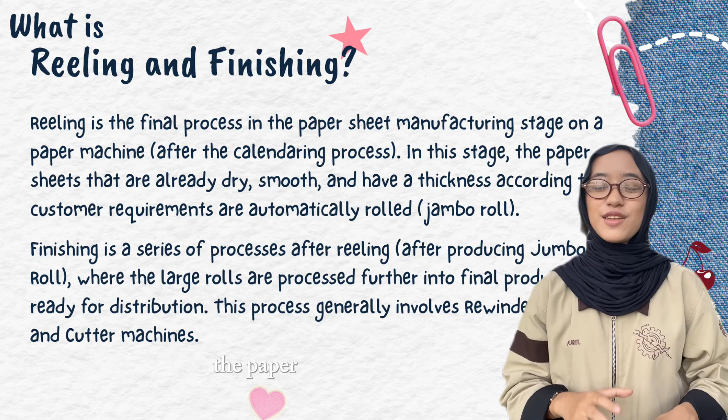What is the reeling process and finishing process? Reeling is the final process in the paper sheet manufacturing stage on a paper machine, I mean, after the calendering process. In this stage, the paper sheets that are already dry, smooth, and have a thickness according to customer requirements are automatically rolled into jumbo rolls.

How about the finishing process? Finishing is a series of processes after reeling. Yes, after producing the jumbo roll, the large rolls are processed into final products ready for distribution. This process generally involves reeling, winder and slitter, and also finishing.

Okay, how about the purpose of the reeling process? The purpose of the reeling process is, first, to convert continuous sheets into rolls. Continuously produced paper needs to be collected in large rolls so that it can be transferred to the next processing station. Second, to maintain quality. Rolls are made with uniform thickness and tension to prevent sheet damage before further processing.

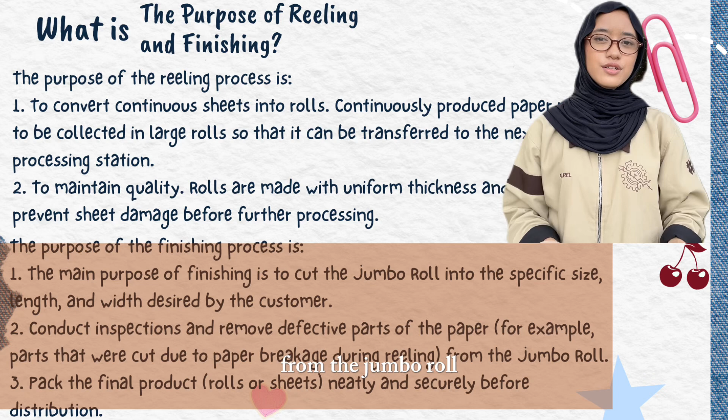And now I will explain the finishing process. The main purpose of finishing is, first, to cut the jumbo roll into the specific size, length, and width desired by the customer. Second, conduct inspection and remove defective parts of the paper, for example, parts that were cut due to paper breakage during reeling from the jumbo roll. Third, pack the final product, rolls or sheets, neatly and securely before distribution.

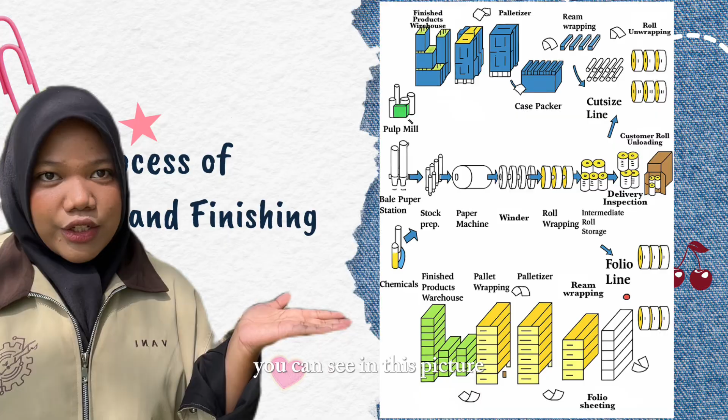Hello everyone. So, this is the general section of the reeling and finishing process you can see in this picture. The first one is the paper machine. The paper exits the paper machine after completing a 500 meter journey and then is automatically wound onto a big jumbo reel which can weigh 60 tons and 7 meters long. This jumbo reel is lifted by crane to a nearby winder.

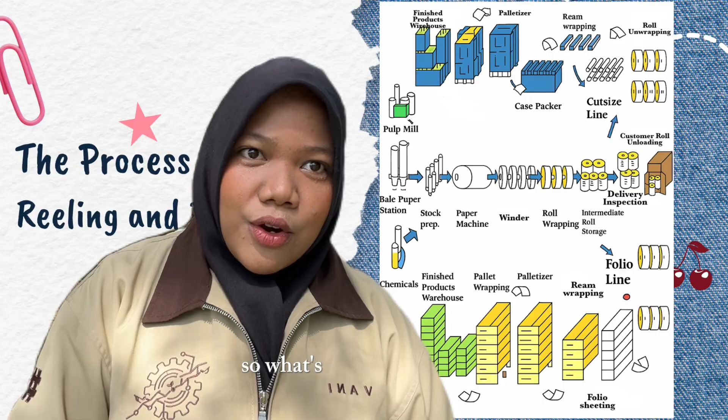So what's going on in the winder? In the winder, the reel, known as the mother reel, is unwound and cut into smaller rolls according to the customer requirements.

After the winder, we go to the roll inspection and wrapping. The roll goes to the inspection area, where we check the quality or defects—quality like tensile, burst, and so on, and defects like wrinkles and holes. After that, the rolls that pass inspection are wrapped and stored in an intermediate roll store area before continuing to the next section.

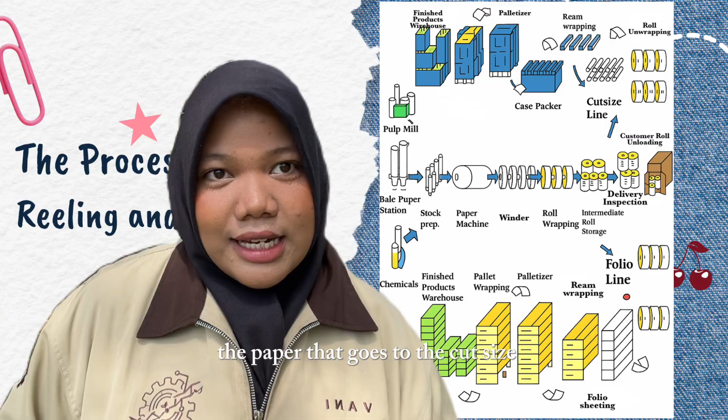After the storage, we have two different sections of finishing: a cut size line and a folio sheet line. The paper that goes to the cut size line is cut into smaller sizes, known as A3, A4, and so on. The paper that goes to the folio sheet line is cut into larger sizes. Comparing the two, the folio is larger, and the paper for folio sheet is used for industrial application, packaging, and printing.

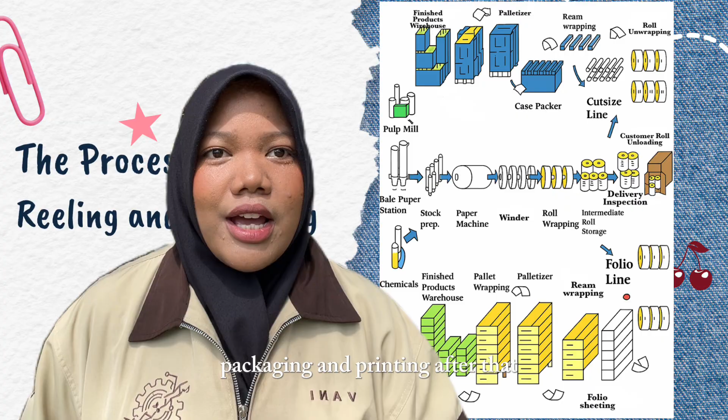After that, product from the cut size line and folio sheet line goes to finishing and is prepared for distributing. So, next we look at the key components of the reeling section.

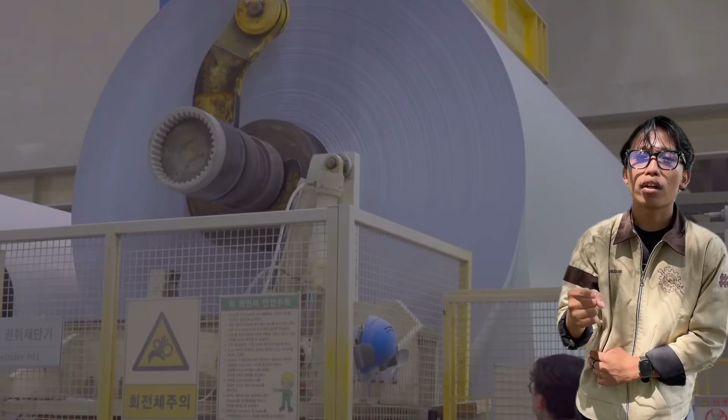Now let's take a closer look at the major components involved. The first one is the reel drum. The reel drum is a large rotating drum covered with wear resistant material. It guides the paper web, provides winding torque, and controls surface contact during winding.

Second, reel spool or reel shaft—a cylindrical steel shaft that becomes the inner core of the jumbo roll. Third, primary arms—hydraulic or pneumatic swing arms that hold the spool and control it with pressure against the drum. Fourth, reel loading system.

The reel loading system manages the nip pressure between the drum and spool, ensuring correct roll hardness. Fifth, the web tension control system—a combination of load cells, dancer rolls, synchronized drive, and automatic feedback that keeps web tension stable.

Sixth, reel drive or motor system. This provides the rotational force for winding, usually controlled by a variable frequency drive, or VFD, for smooth acceleration and deceleration.

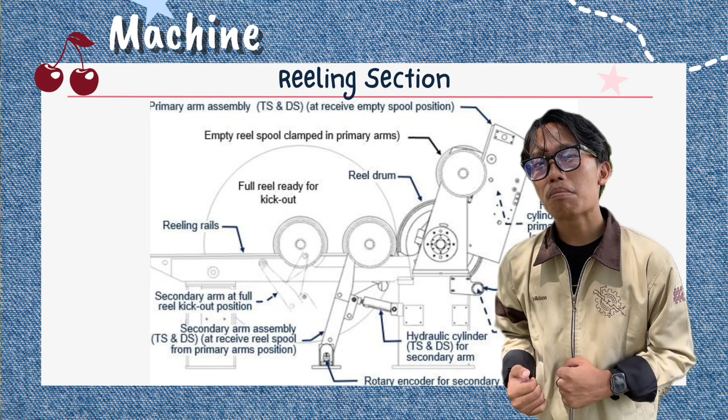Eleventh, automatic spool loading mechanism. This loads a new empty spool into the arm automatically, allowing the next roll to begin immediately without stopping the paper machine. All of these components must work precisely, quickly, and safely, matched to the continuous speed of the paper machine.

So, the slitter rewinder is a key machine in finishing. One of the most important machines here is the slitter rewinder. Its function is to rewind the mother roll and cut it into smaller rolls based on customer needs. Its main components are: first, the unwind stand, which holds and rotates the mother rolls.

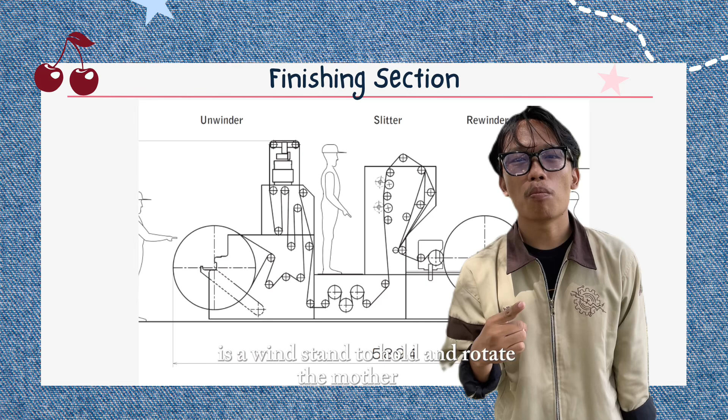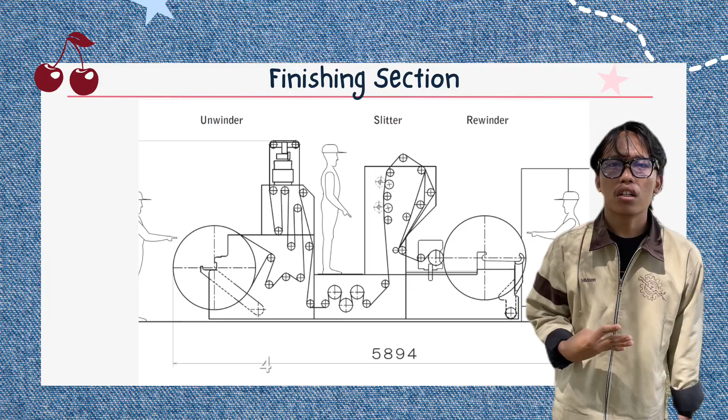Second, the slitting knife set—a circular or razor blade used for longitudinal cutting. Third, the rewind shaft or rewind drum, which winds the cut web into smaller rolls. Fourth, the tension control system, which keeps the tension balanced between the unwind and rewind sections.

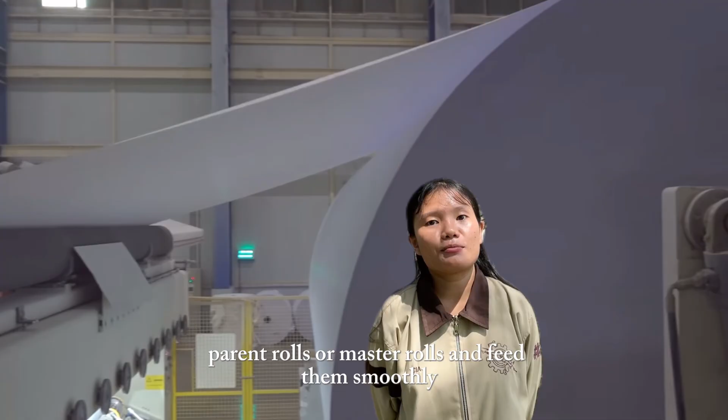The unwind section is the part of the machine that unrolls large material rolls—parent rolls or master rolls—and feeds them smoothly, continuously, and evenly into the next process, such as printing, cutting, slitting, or forming.

Main functions of the unwind section: the first function is tension control. The material must not be too tight or too loose. If too tight, it can break. If too loose, it can wrinkle or shift. So the unwind section keeps the tension stable while the roll is running.

The second function is speed control. The unwinding speed must match the speed of the main machine. If the speeds are different, the material can slip, jam, or break.

Next is web guiding. This function keeps the material straight and in the correct position. Sensors help make sure the material does not move left or right.

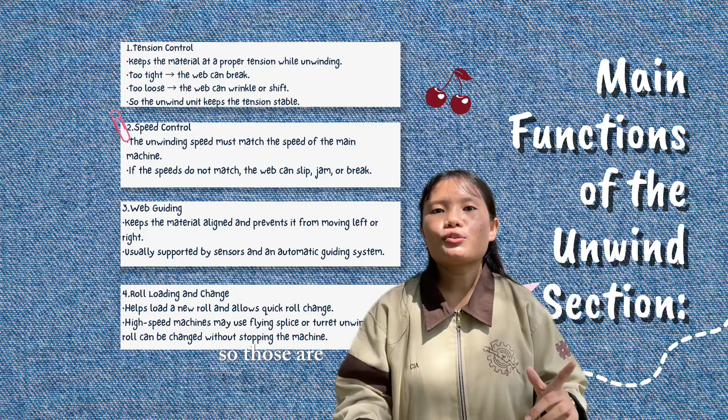The next function is roll loading and roll change. The unwind section helps load a new roll safely. On high speed machines, roll change can be done without stopping the machine using a flying splice or turret system. So those are the main functions of the unwind section. It makes sure the material unwinds smoothly, safely, and continuously before going to the next process.

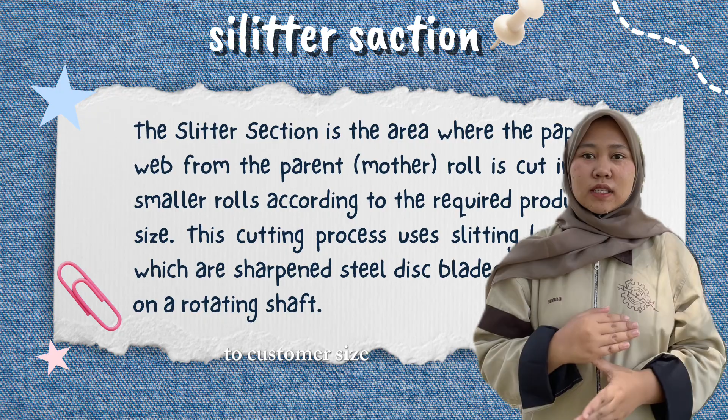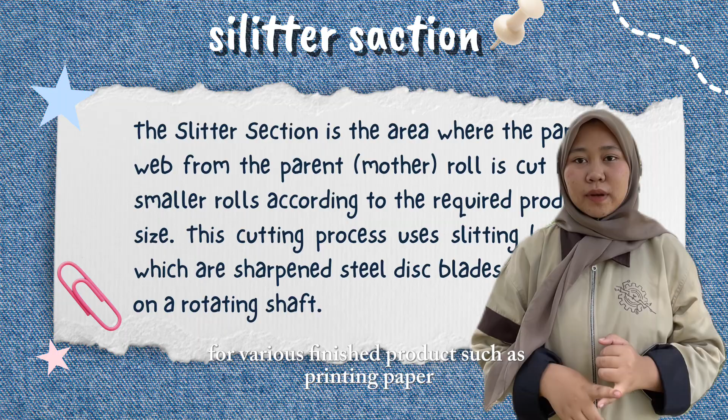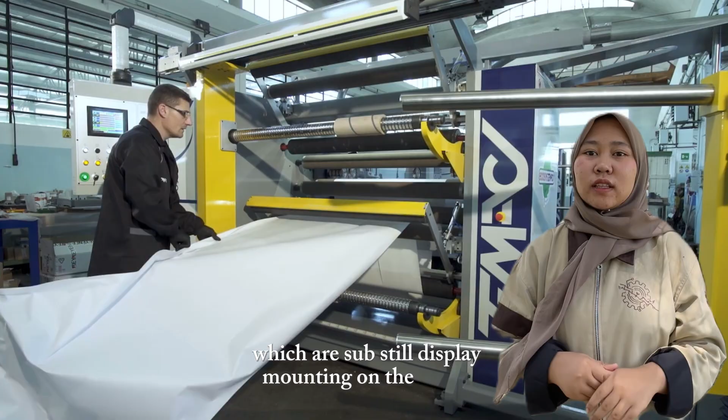The slitter section is a processing area where continuous paper sheets from the mother roll are cut into smaller rolls to customer size requirement and product specification, allowing the wet paper web to be divided into narrow rolls for various finished products such as printing paper, tissue, packaging, or other special goods. The cutting process is carried out using slitting knives, which are sharp steel disc blades mounted on a rotating shaft, spinning at high speed to make precise longitudinal cuts on the moving paper web. The blades can be adjusted to the required roll width so that the finished product meets exact measurement and specification.

Now I'll explain about the winder or wind-up. The winding area is the part of the machine where paper from the parent roll is rewound onto the core and slit into trims of various widths according to customer requirements.

The machine used is the rewinder. The rewinding process essentially involves rewinding sheets of paper that have been cut, for example from a large jumbo roll, into smaller rolls for easier handling and transportation. Once the paper is rewound into rolls of a specific size and weight, these rolls are lifted by a crane and moved to the finishing area.

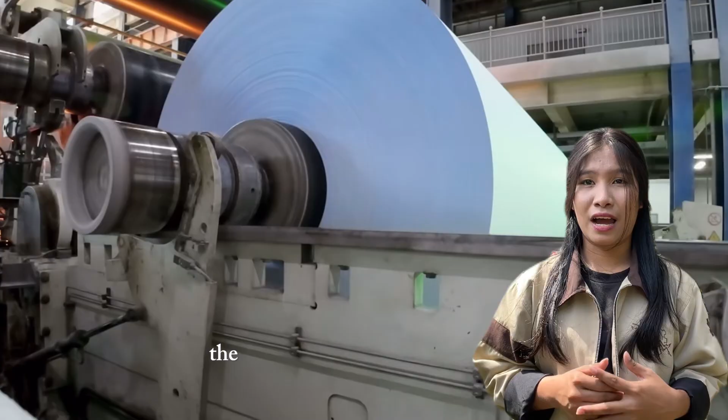In the finishing area, the roll is labeled and cut to size such as A4. After slitting, the paper is directed to the winding system, where tension control is critical to prevent wrinkles, telescoping, dust, or hardness defects. So tension setting must ensure that the first layer of winding is smooth with no bumps.

The bottom layers are tight to avoid wrinkles. The middle layers become gradually looser because if they are too tight, the upper layers might break. And the outer surface is tightened again, offering a stable roll structure.

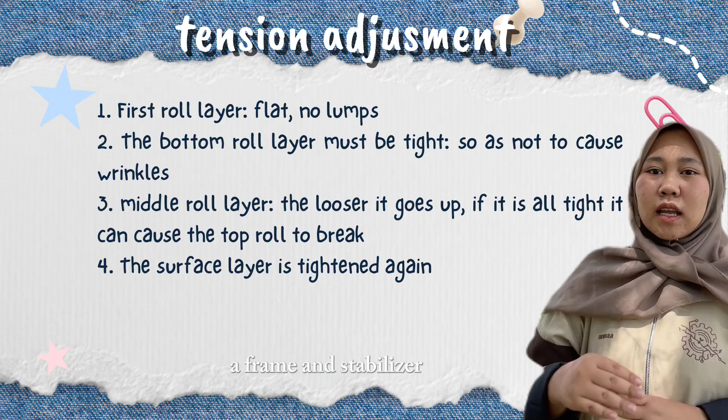For this, second, I'll explain about roll handling. The roll handling process includes safe transportation, quality inspection of finished rolls, and preparation of packaging according to customer requests. Roll handling in the paper industry has several important objectives and things that must be considered to maintain production efficiency, product quality, and work safety.

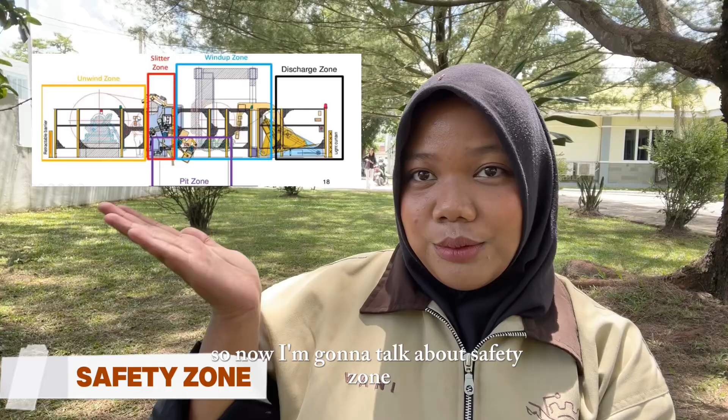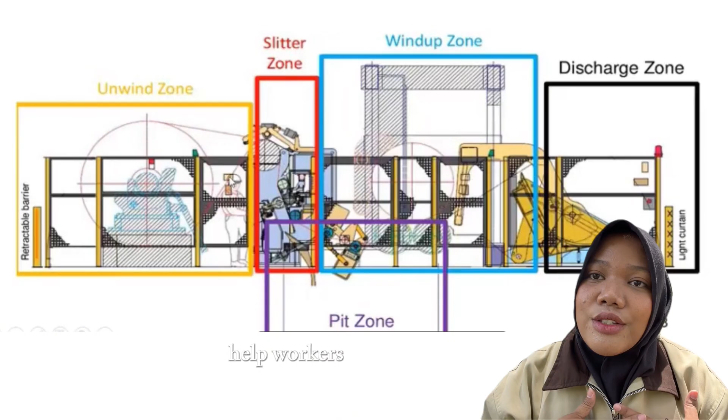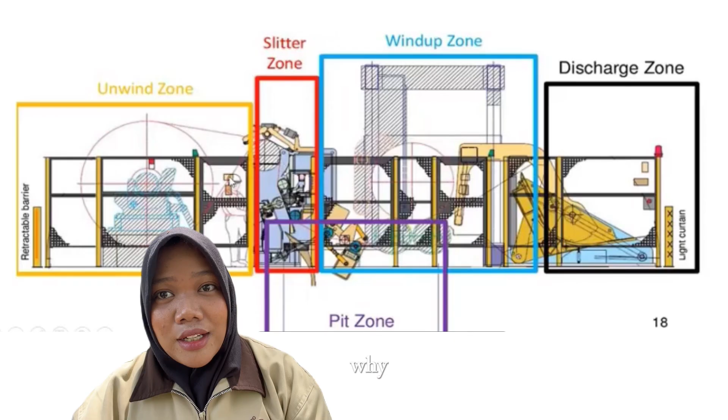So now I'm going to talk about safety zones. As you can see, there's so much color like red, yellow, blue, purple, or even black. The purpose of this color difference in safety zones is to help workers quickly recognize danger level and safe areas in the factory. As you can see in the unwind zone, the color is yellow. Why? Yellow means the unwind zone has a medium to high danger level because it involves large moving rolls that can be dangerous if approached while operating.

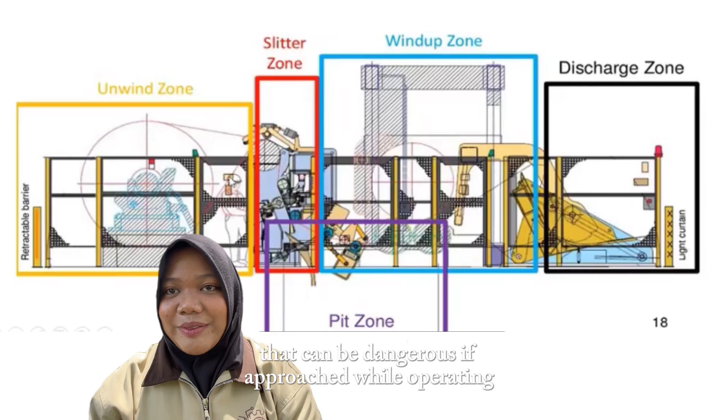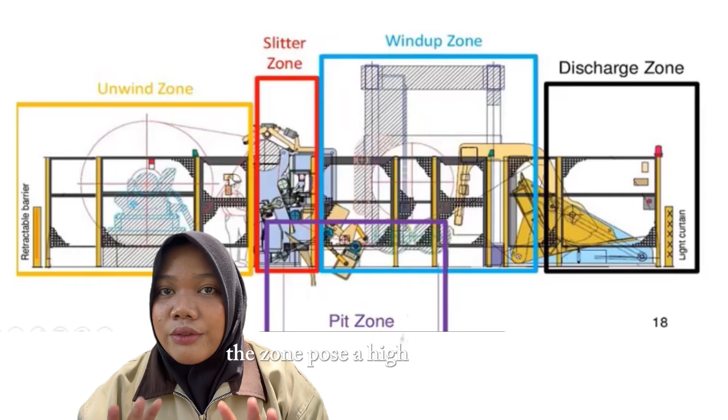And the slitter zone, the color is red. It means if someone enters the slitter zone, it's a very dangerous area. The zone poses a high risk due to cutting mechanisms. It's strictly isolated and often equipped with interlock systems.

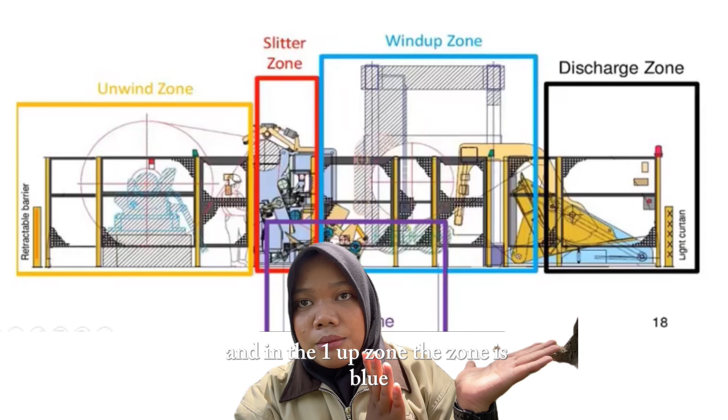And in the wind-up zone, the color is blue. The wind-up zone has a moderate to medium danger level. This area contains winding arms and rotating shafts that roll the paper under tension.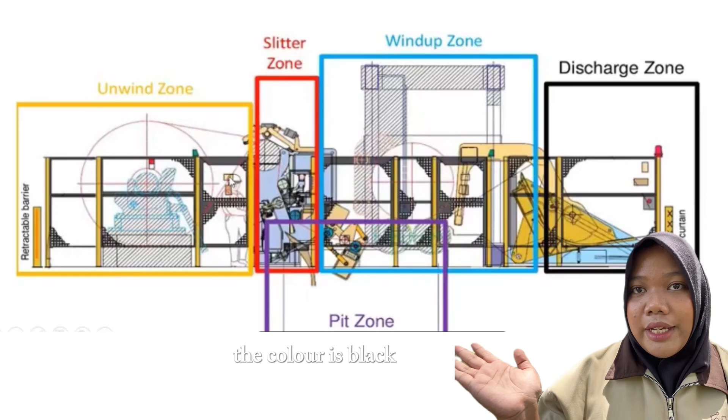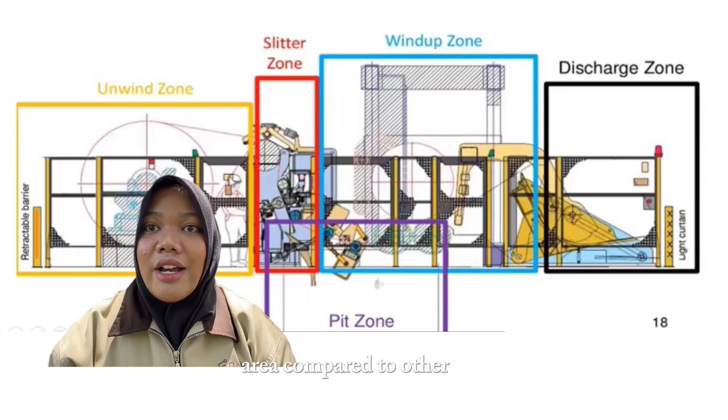Next, in the discharge zone, the color is black because it's extremely dangerous. This area includes lifting devices and conveyors. And lastly, in the pit zone, the color is purple because it is considered a low risk area compared to other zones. So that's all the different colors in the safety zone and the meaning of each color.

Together, the reeling and finishing section form the final stage of the paper machine, turning a continuous moving line into perfectly formed rolls ready for shipment. This entire process blends precision control, automation, and craftsmanship, ensuring consistent quality in every roll produced.

This is where it all begins. A place that feels like home. Every hallway has a memory. Every classroom, a story waiting to be told.